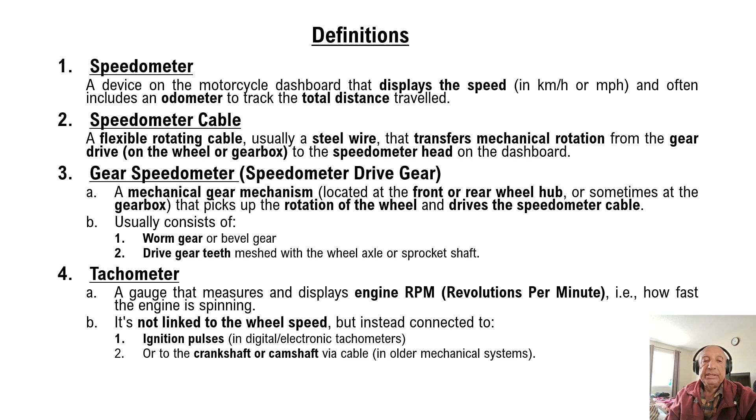Tachometer: it measures engine RPM in terms of rotation per minute.

This illustration indicates the parts involved in the linkage of this total mechanism: gear speedometer, gear, then speedometer cable, which is connected to the speedometer.

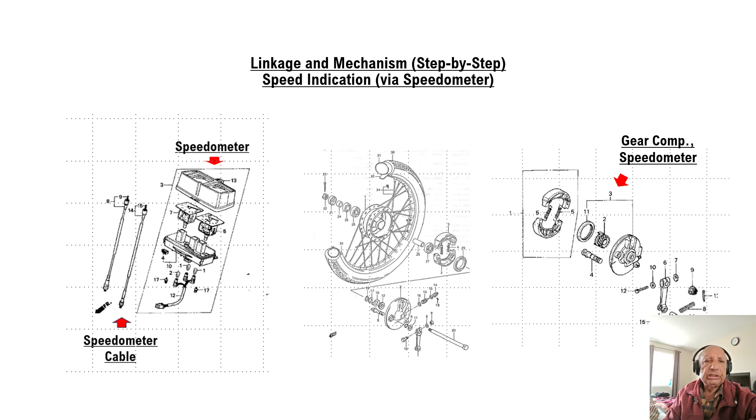The working of this linkage is as follows. As a motorcycle moves, either the front wheel, rear wheel, or gearbox output shaft rotates. This rotation turns the speedometer drive gear mounted on the hub or gearbox. As a result, the speedometer cable connected to the gear drive rotates in synchronization with the wheel speed.

Thereafter, inside the speedometer, the rotating cable spins a magnet placed near a metallic aluminum cup. Due to magnetic induction, the spinning magnet causes the cup, and thus the needle, to move.

A hairspring resists this movement, allowing the needle to stabilize at a point proportional to the rotational speed, giving a speed reading. The same cable also drives gears inside the speedometer that turn the odometer and trip meter, recording distance traveled either in kilometers or in miles.

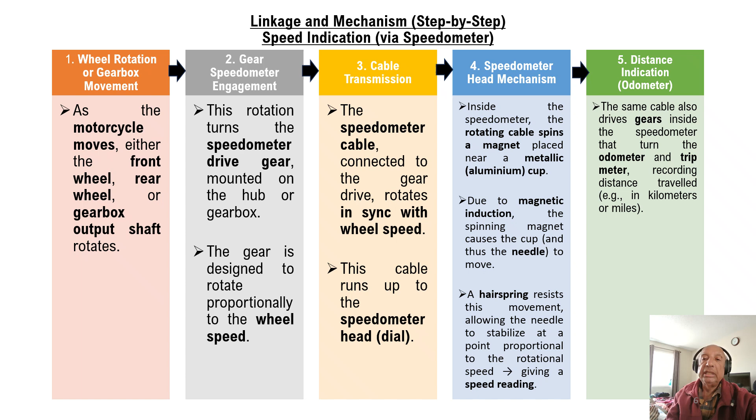RPM indicator: for mechanical tachometers, mostly applicable to older models, a separate tachometer cable is connected to the engine crankshaft or camshaft and works like a speedometer cable. For electronic tachometers, mostly on modern motorcycles, they receive electrical signals from the ignition coil or ECU. These signals are processed to calculate engine RPM, and the result is displayed on the needle or digital display.

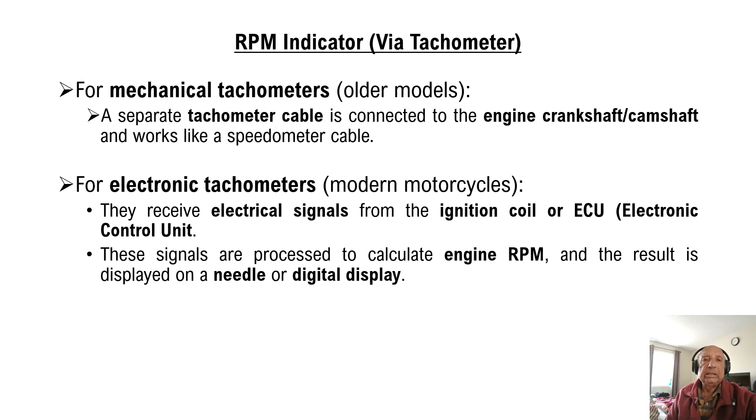In a nutshell, the speedometer displays the distance in terms of miles or kilometers, and the speed in terms of kilometers per hour or miles per hour. Speedometer cable drives the speedometer. Gear speedometer rotates the cable. Tachometer shows RPM, or revolution per minute.

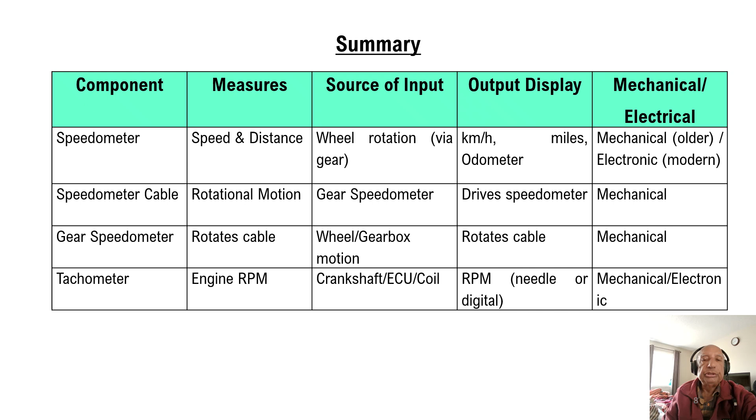How to conduct the speedometer test? When the vehicle is ready, run it through the test course at a specified speed as indicated by the speedometer, and at the same time make an actual speed measurement. The test speed should start with 20 km per hour and increase at intervals of 10 km per hour for each successive run.

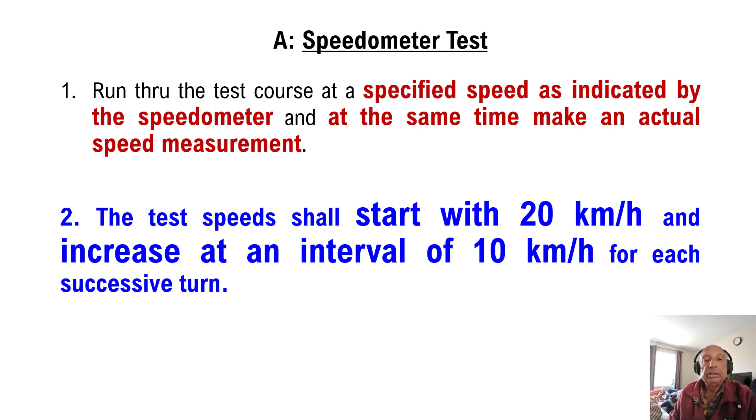With the result obtained by the actual measurement as stated in number 1, determine the speedometer correction rate. The speedometer correction rate, CV, is equal to V divided by V dash multiplied by 100, where CV is the speedometer correction rate, V is the actual speed in kilometers per hour, and V dash is the speed indicated by the speedometer in kilometers per hour.

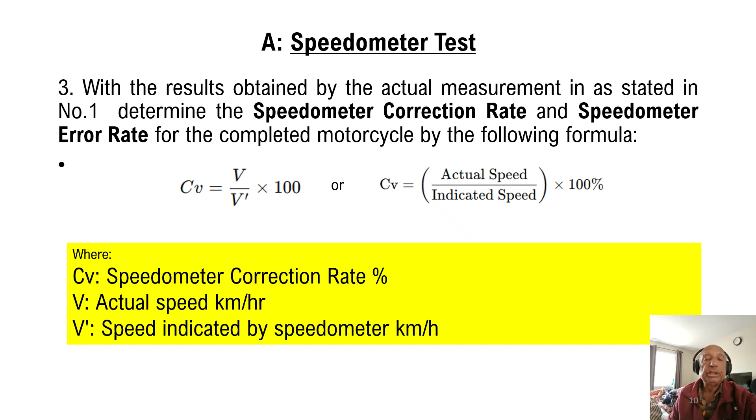Speedometer correction rate shows the percentage ratio of the actual speed to the indicated speed by the speedometer, and is used to assess how much the speedometer reading deviates from the real speed. Speedometer correction rate equals actual speed divided by indicated speed, multiplied by 100.

Its interpretation: if CV is equal to 100%, the speedometer is accurate. If CV is less than 100%, the speedometer overstates the speed, showing more than actual. If CV is greater than 100%, the speedometer understates the speed, showing less than actual.

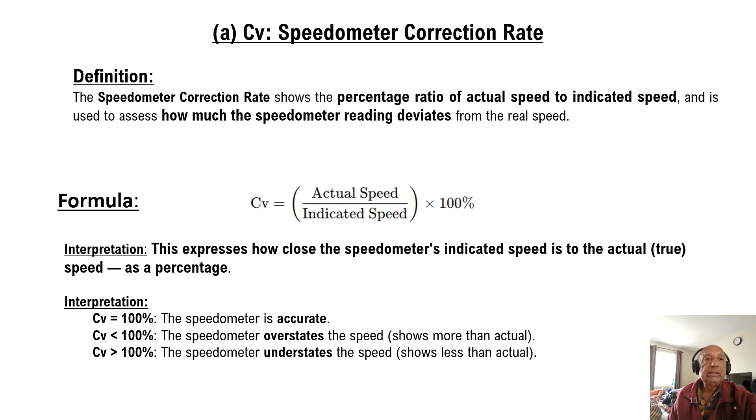Let us consider this example. Here, the actual speed is 100 km per hour, and the indicated speed is 105 km per hour. Therefore, the speedometer correction rate is equal to...

...95.24%, using this formula. Meaning thereby, the indicated speed is about 4.76% higher than the actual, that is, it is overstated.

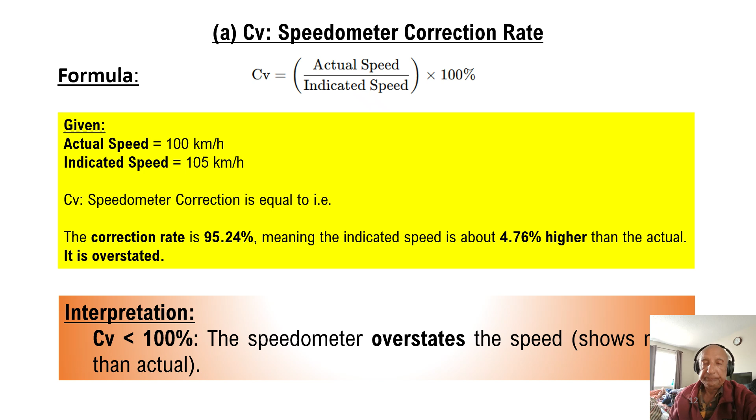Coming to speedometer error rate. Speedometer error rate is the percentage difference between the speed indicated on the speedometer and the actual speed. It tells us the percentage deviation of the indicated speed from the actual speed. The formula is E equals V dash minus V divided by V multiplied by 100. That is, E equals indicated speed minus actual speed divided by actual speed multiplied by 100.

Its interpretation is as follows. If E is 0%, the speedometer is accurate. If E is greater than 0%, the speedometer reads faster than actual. If E is less than 0%, the speedometer reads slower than actual.

Let us consider an example. Given, if the actual speed is 100 km per hour, indicated speed is 105 km per hour, then error rate is V dash minus V divided by V into 100. That is, error rate equals 105 minus 100 divided by 100 into 100, equal to 5%.

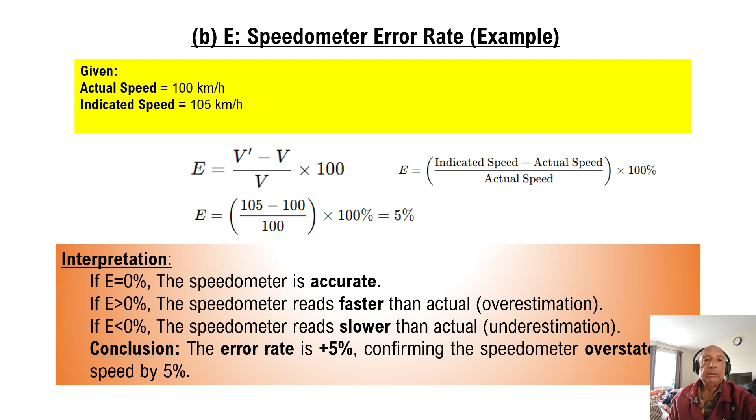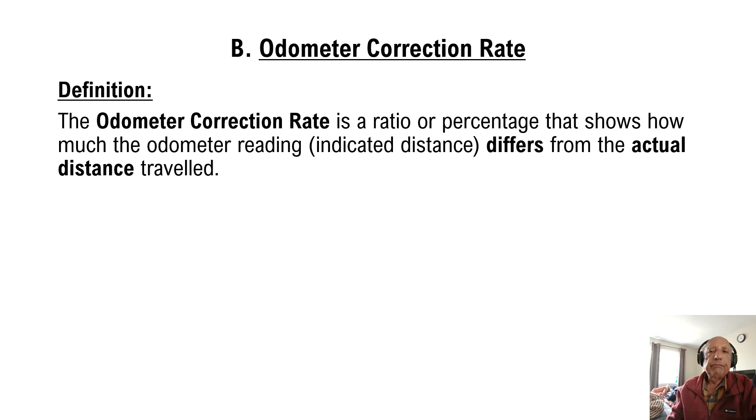Let us now move forward to odometer correction rate. Odometer correction rate is a ratio or percentage that shows how much odometer reading, that is indicated distance, differs from the actual distance traveled.

How to conduct this test? To start with, one rider moves the test motorcycle on the test course so that the speedometer driving wheel rotates several times. Then measure the distance moved and obtain the wheel effective diameter by the following formula. Perform the test at least 3 times and obtain the average value.

The formula is the effective diameter equals L divided by pi n, where D is wheel effective diameter in meters, L is the distance moved in meters, n is the number of wheel rotations.

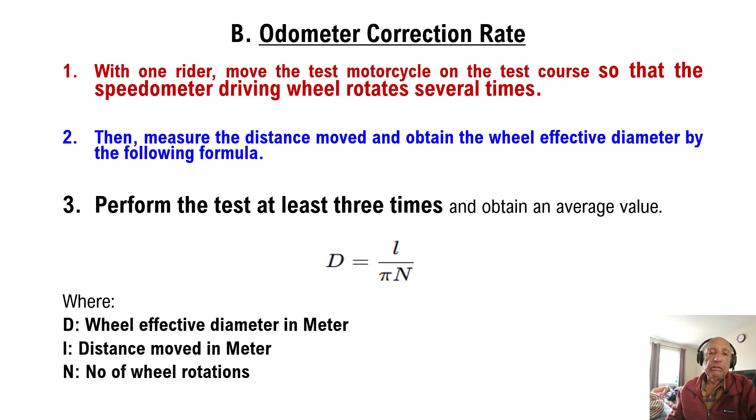With the result obtained as specified above, calculate odometer correction rate by the following formula. Correction rate equals pi D multiplied by K1 multiplied by K2, where D is wheel effective diameter, K1 is distance meter rate, K2 is speed reduction ratio for distance meter driving.

K1 can be defined as the number of speedometer shaft rotations divided by distance indicated by distance meter. K2 equals number of wheel rotations divided by number of speedometer shaft rotations.

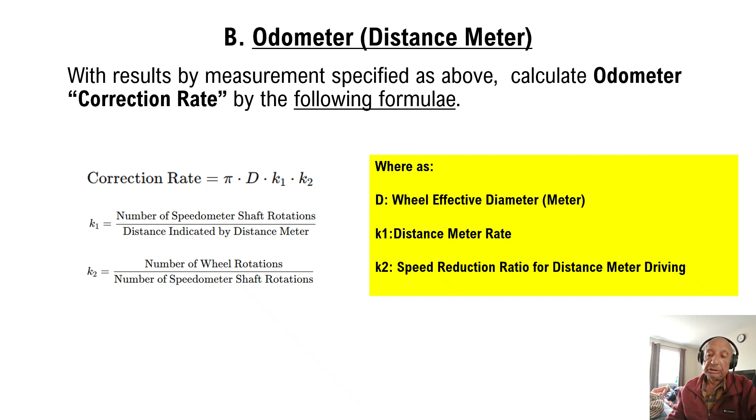How can we calculate the effective diameter of the wheel? We can calculate it, provided we know how far the vehicle has moved, that is the distance L, and how many times the wheel has rotated, that is number of rotations. We know the circumference of the wheel is equal to pi d, and if the wheel rotates 1 time, the total distance covered will be pi multiplied by d. If the wheel rotates for n number of rotations, the total distance covered would be pi dn.

With this formula, we can conclude that the effective diameter of the wheel is L divided by pi multiplied by n.

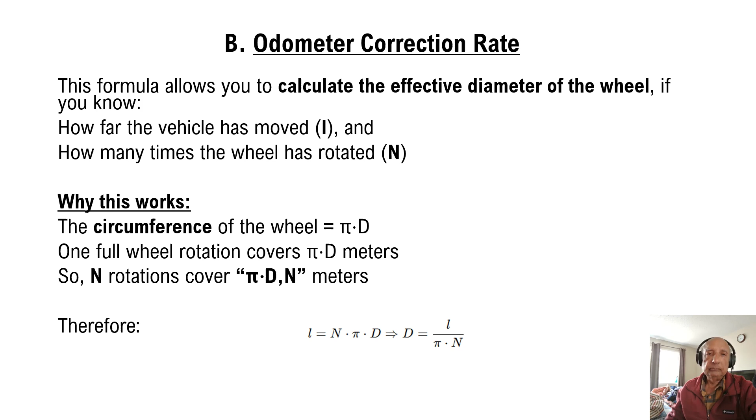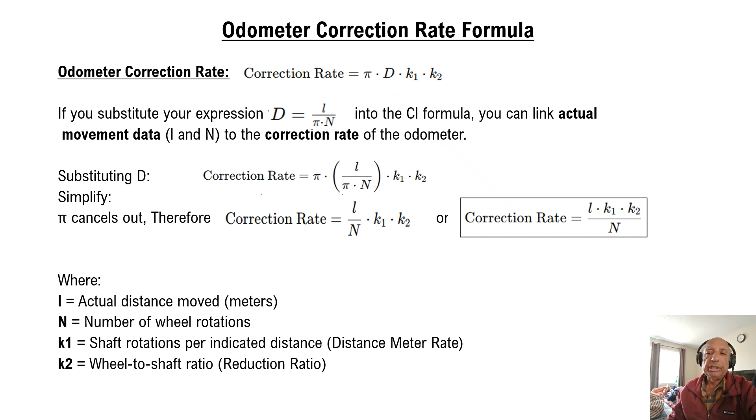Coming back to the odometer correction rate formula, odometer correction rate is pi d K1 K2. And if we substitute the value of d, that is d equals L divided by pi multiplied by n, we get pi into L divided by pi n multiplied by K1, K2. That is, pi and pi get cancelled out. Therefore, the odometer correction rate comes out to be L, the total distance moved, into K1 constant, into K2 constant, divided by number of rotations.

Its practical meaning would be that the correction rate depends upon how far the motorcycle has really moved, that is the distance L, and how many times the wheel has rotated, that is number of rotations N, and how the speedometer system converts these movements into the distance on the odometer using constants K1 and K2 factors.

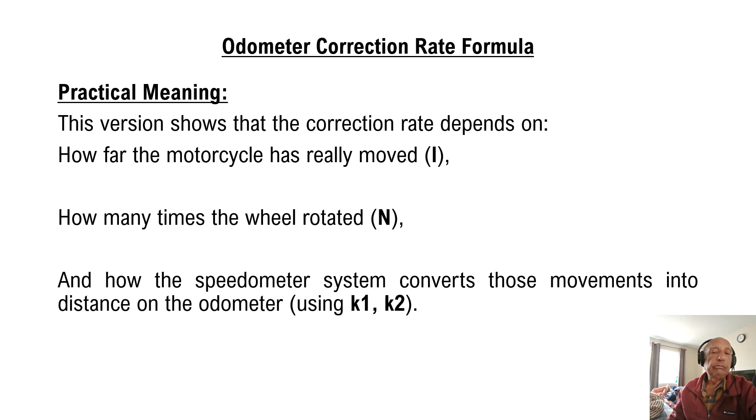Now, how do the speedometer systems convert those movements into distance on the odometer? We know the odometer does not measure distance directly. It counts mechanical rotations, especially of the speedometer shaft, which is driven by the wheel. The two ratios K1 and K2 explain how wheel movement is mechanically translated into odometer readings.

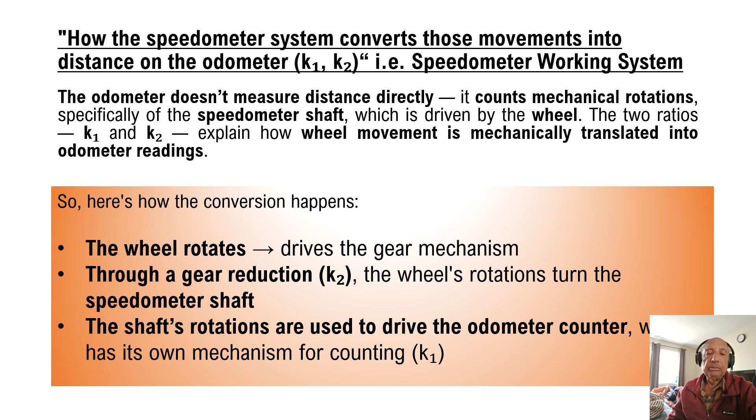So here is how the conversion happens. The wheel rotates, that is, it drives the gear mechanism. Through gear reduction K2, the wheel rotations turn the speedometer shaft. The speedometer shaft rotations are used to drive the odometer counter, which has its own mechanism for counting K1.

What exactly is K1? K1 is odometer rate, which can be expressed by the formula: number of speedometer shaft rotations divided by distance indicated by odometer in meters. Meaning thereby, it tells us how many shaft rotations are needed to increase the odometer by 1 meter. This depends upon the internal gear ratio and mechanical setup of the odometer unit.

And we can explain by this. Say if K1 is equal to 2.0, the odometer moves 1 meter for every 2 shaft rotations. Higher K1 means more shaft rotations are needed, that is, odometer advances more slowly. Lower K1 means fewer shaft rotations are needed, that is, odometer advances faster.

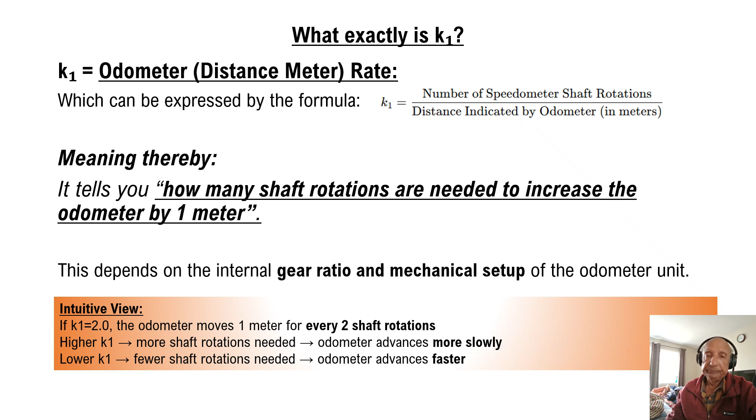Coming to K2. K2 is a speed reduction ratio for odometer. It can be expressed as K2 is equal to number of wheel rotations divided by number of speedometer shaft rotations. Meaning thereby, it tells us how many wheel rotations are needed to produce one shaft rotation. This is part of the mechanical link between the wheel and the speedometer or odometer system via gears or cables.

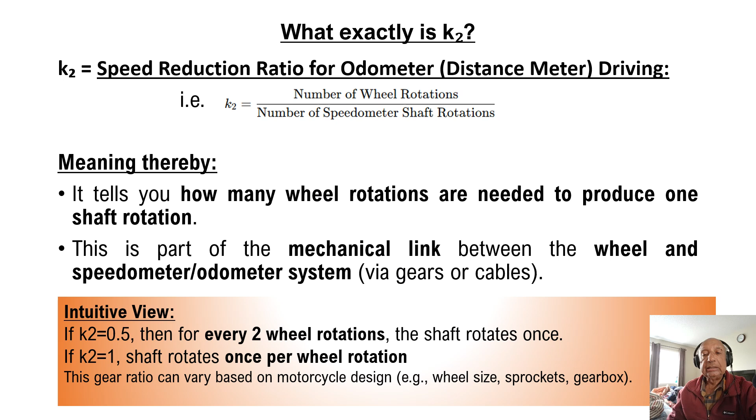We can say that, say if K2 is equal to 0.5, then for every 2 wheel rotations, the shaft rotates once. If K2 is equal to 1, the shaft rotates once per wheel rotation. This gear ratio can vary based on motorcycle design, that is, wheel size, sprocket, gearbox, etc.

Who provides K1 and K2? K1 is typically provided by the speedometer odometer manufacturer because it is tied to the internal gearing system of the odometer unit. It may be specified in technical manuals, parts datasheets, or calibration guides, etc. K2 is typically determined by the vehicle manufacturer, since it depends upon the wheel size, gear train from wheel to speedometer cable, and gear ratios in the wheel hub or transmission.

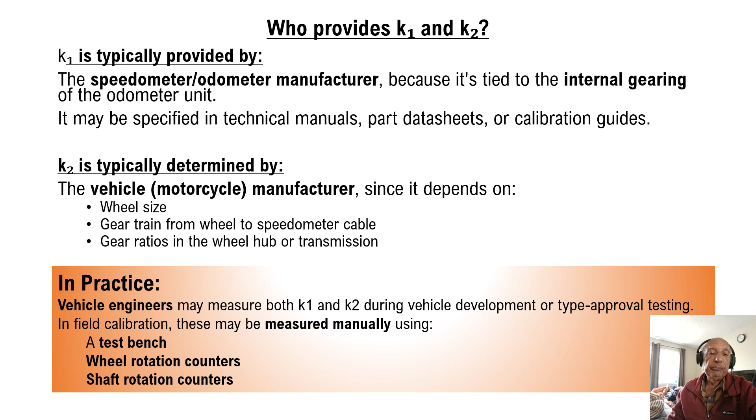In practice, vehicle engineers may measure both K1 and K2 during vehicle development or type approval testing. In field calibration, these may be measured manually using test bench, wheel rotation counters, and shaft rotation counters.

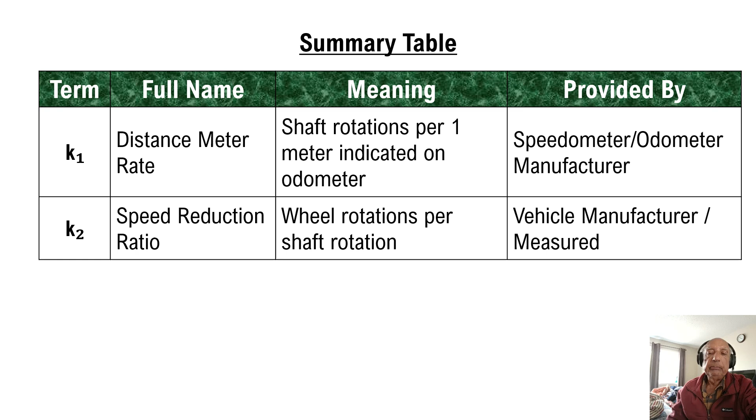Summary regarding the constants K1 and K2. K1 is distance meter rate; its meaning is shaft rotations per 1 meter indicated on odometer. It is provided by the speedometer manufacturer. K2 is speed reduction ratio, that is, wheel rotations per shaft rotation. It is to be provided by the vehicle manufacturer.

Let us consider a practical example. Suppose the vehicle under test has traveled the distance 1000 meters, that is L. Wheel rotations are N, that is equal to 900. K1 is 2.0. K2 is equal to 0.5.

The odometer correction rate will be 1000 multiplied by 2.0 multiplied by 0.5 divided by 900, or 1000 into 1.0 divided by 900, or 1000 divided by 900, that is 1.111. That is, correction factor is 111.11%.

Meaning thereby, the odometer is over-reporting the distance by about 11.11%. The motorcycle would need calibration to reduce this overestimation.

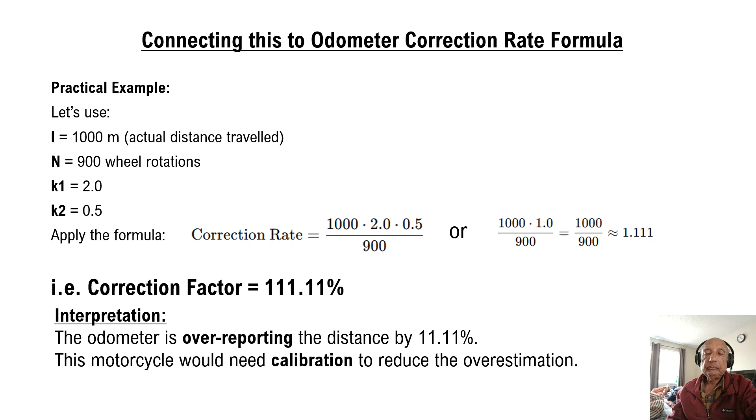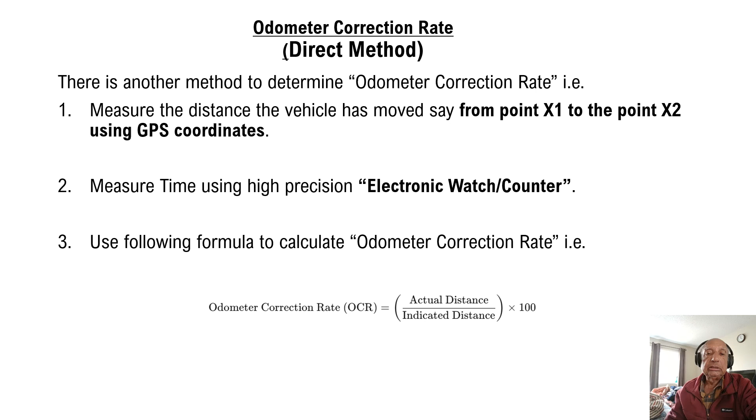Odometer correction rate can also be determined by the direct method. The procedure is: measure the distance the vehicle has moved, say from point x1 to x2, using GPS coordinates. Measure time using a high precision electronic watch or electronic counter. Use the formula to calculate odometer correction rate: odometer correction rate is equal to actual distance divided by indicated distance multiplied by 100.